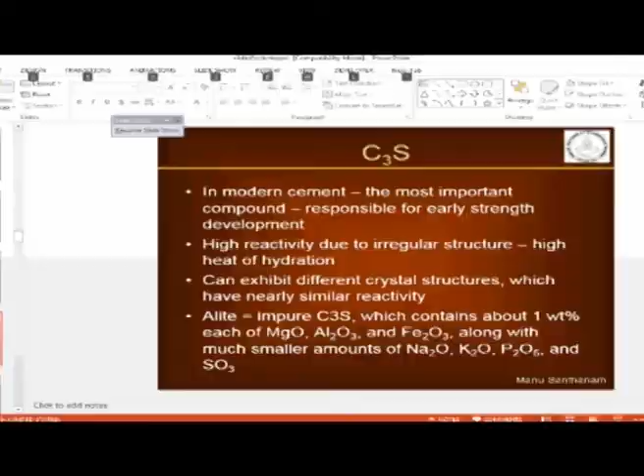Now, how did modern cement get developed? One of the names that comes up in the history of cement development is John Smeaton. Interestingly, John Smeaton was apparently the first civil engineer. Many of you may not be aware that prior to John Smeaton's construction projects, building was essentially taken care of by the army or the military. He was the first person outside the army or military to take up building construction, and that's why he was called the father of civil engineering. He was the first civil engineer, and interestingly, his name also comes up as one of the first sort of cements that was actually used.

While planning the building of a lighthouse tower in the UK in 1756, he found by accident that the best limes used for mortar had a very high degree of clayey matter. That means there were impurities present in the lime that made it very interesting and interactive with water, giving very interesting properties to the lime mortar, improving the binding capacity and so on.

So what he did ultimately was use this kind of impure lime along with pozzolanic material in equal quantities, and this led to the construction of the Eddystone Lighthouse Tower. This was constructed in 1759, but it's no longer in service. It was shifted brick by brick to a different location, but it's still a major national landmark because it was one of the structures first built by a non-military person.

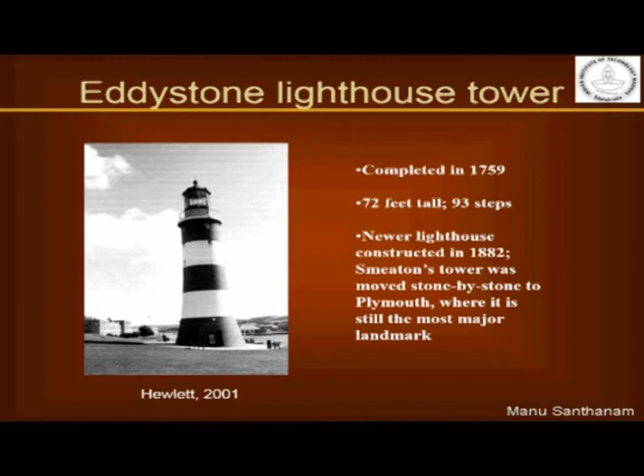One more name you may have heard of is Vicat. Many of you might have tested cement in the lab, and one of the common apparatuses we typically use is the Vicat apparatus. We use it for testing normal consistency and setting time of cement, and we establish how much water is actually required by the cement to get it to a certain workable consistency. So Vicat was one of the principal scientists as far as cement is concerned.

He was the first one to actually prepare an artificial hydraulic lime by calcining or burning an intimate mixture of limestone and clay. That's truly how cement is also manufactured. But until that time, people were simply adding this lime or impure form of lime and expecting it to perform well without really understanding the reactions between the lime and clay. Probably the first person to do this actively was L.J. Vicat, a French scientist.

Now, in the stages of cement development, people have looked at different types of cement over the ages. Today we call it normal Portland cement, but earlier varieties were called proto Portland cement or meso Portland cement, depending on which stage of development we're looking at. One name you might have heard again is Joseph Aspdin.

In 1824, he basically obtained a patent for his cement. Until that time, people were preparing mixtures of lime and clay and burning them together to get cementitious properties, but Aspdin was probably the first one to patent it, and he termed it Portland cement. That's interesting because even today we call our cement Portland cement. This patent was obtained in 1824 and should have run out years ago, but such is the power of the brand name that even today we call it Portland cement.

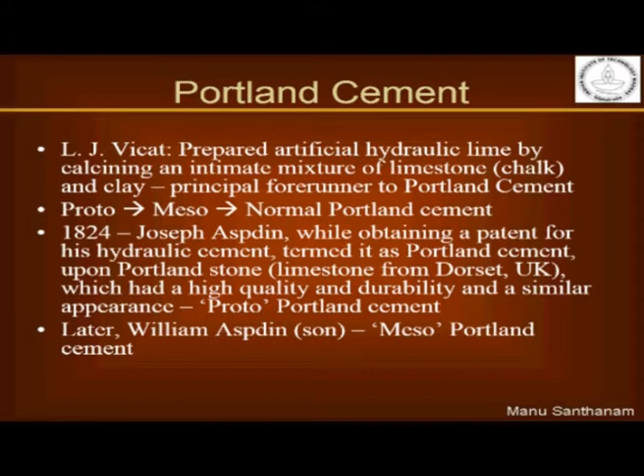Let's take a look at how this was done. This is an example of a kiln that was used for burning by William Aspdin, and on the right side you see an image of the cement actually produced in this kiln, which people removed by scraping off material from the kiln floor. You can see this is a microstructural, microscopic picture with different types of ingredients. The larger grains marked as A are those of alite or C3S, tricalcium silicate, and the smaller grains are those of belite.

This is similar to what you would find in normal Portland cement also, but to some extent the sizes of the crystals forming and their reactivities are quite different. What are the differences principally? Let's take a look at some of these.

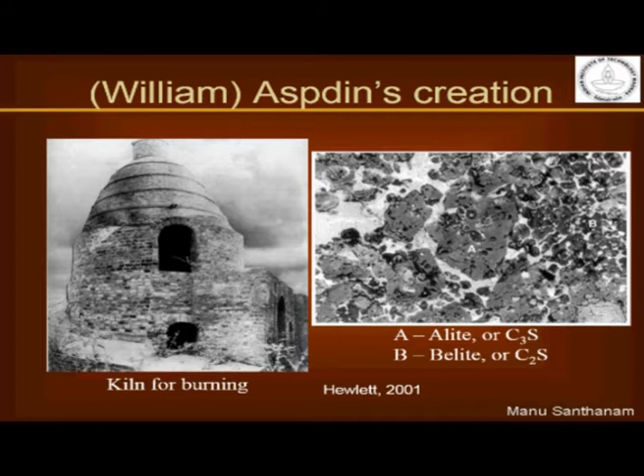If you look at the clinker prepared by Aspdin, the relative burning rate of the clinker would have been quite slow. If you've seen some of the kilns used for brick manufacture in rural areas, you see these are mostly of the vertical type. The material used for construction or preparing the brick is charged into the kiln, then you have the heating source from below, and once burning is completed, you retrieve the material and that's your cement.

In modern kilns, of course, we use a rotary kiln. You feed the material at one end and it simply rotates in the kiln and comes out at the other end, ensuring an almost continuous process of manufacture.

As a result, the modern clinker has a relatively quick burning rate. It spends time in the kiln only for about 30 minutes, whereas in the old times the clinker would have spent as long as it could possibly, based on when they actually removed the material.

As a result of this, the kind of crystals you form of C3S and C2S could be quite different. For example, the alite or C3S size was probably about 60 microns in the old clinker, whereas today most alite crystals are 10 to 15 microns in size, with the overall range varying between 10 to 40 microns. Belite, on the other hand, is a lot bigger today than it was before.

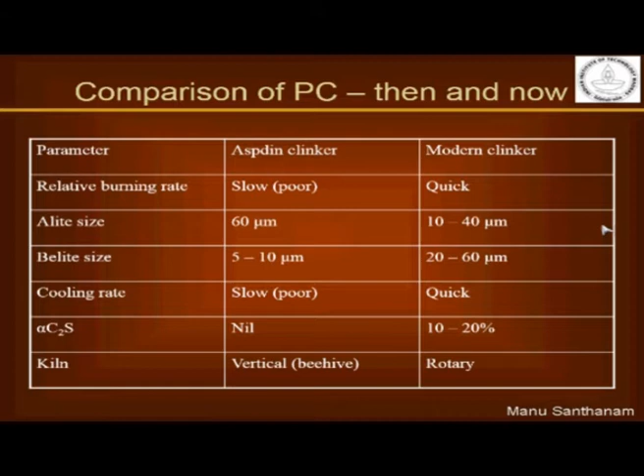Okay, so now let's look at how cement is manufactured in modern plants. You have to keep in mind that cement is a very unusual industrial product. It is produced in very large quantities.

In case you didn't know, in the years 2014 and 2015, the amount of cement produced across the world was 4,000 million tons. So very large quantities of cement, and these are produced in plants that can almost produce nothing else, because cement plants have to be dedicated to producing cement.

The product is produced by a combination of several unusual operations which involve mining, very fine scale mixing or blending of raw materials, very high temperature clinkering reactions, controlled cooling, grinding, blending, and finally shipping in packaged form under very highly controlled conditions. Chemical composition is maintained within narrow limits.

Because ultimately, when the cement goes out to market, when you buy a bag of cement, you have to be sure of its performance. As a result, when they sell the cement, it's sold with a very high degree of control on the chemical composition, otherwise you will not get the right kind of performance.

So again, this is done in spite of very large tonnages. I already told you that 4,000 million tons was actually sold as far as cement was concerned in year 2015.

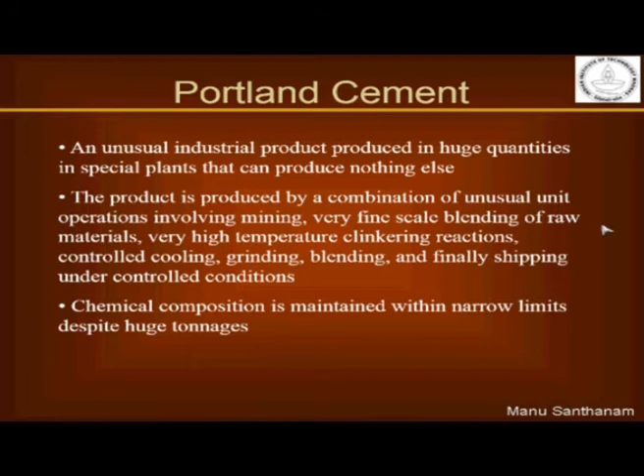Interestingly, India is the second largest producer of cement after China. China was the largest producer and is still the largest producer, but India is expected to overtake China's production by the year 2050, and at that time we'll be the people manufacturing the most amount of cement.

That is only natural because a lot of projects in India are still coming up, and there's a lot of scope for using concrete. And because you're using concrete, you have to use a lot of cement in it.

Now, if you look at the investment required to put up a cement plant, it's upwards of $250 million. It's a very large investment.

And in order to manage this level of investment, you have to produce continuously. The cement has to be produced continuously to pay off the cost spent in installing this capital expenditure, and the plants must also produce continuously over the day to ensure that you maintain the integrity of the kiln.

What am I talking about there? Suppose you are producing cement coming out of the kiln, and you stop the manufacturing of cement for some time. The next batch of material that you put into the kiln will not come out with the same kind of quality, the same kind of consistency, as the previous batch.

Every time you stop the manufacturing, the quality suffers. So to ensure that you have the same integrity of the product as well as the process maintained, you have to make it run continuously. People operate 3 shifts per day, 24 hours a day, 7 days a week. They only shut down probably once a year for maintenance, and without that the cement plant won't work properly.

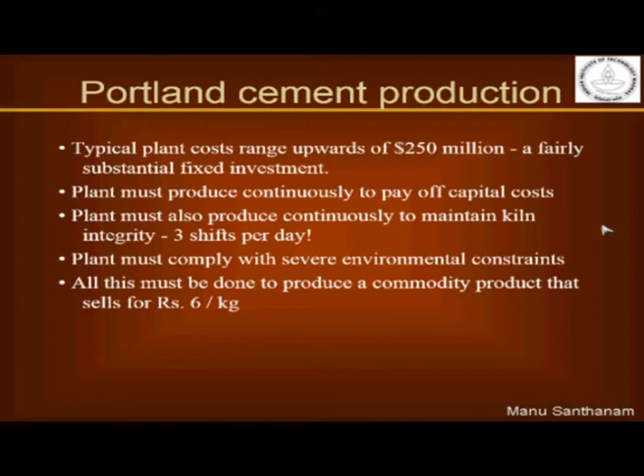As far as raw materials are concerned, the principal raw material for cement manufacture is limestone. We are still clinging to the same technology people used in the past. Lime was the principal binder, then people started using lime with some impurities like clay. Interestingly, cement is basically lime with a lot of clay impurities, and it produces a very interesting combination of products when it comes out of the kiln after reaction.

So the principal source of cement manufacturing is limestone. All cement plants are typically located next to limestone belts or limestone deposits, because that's where you get maximum quantity of limestone, and then you don't have to transport it large distances to make your cement. This limestone gives you calcium carbonate, CaCO3, and it also has some impurities like iron oxide and alumina present within it. The impurities can also include some clay.

Clay is basically aluminosilicate, and in most cases clay is already present as an impurity, but sometimes you may have to extract additional clay to give you the right quantity of silica and alumina, or SiO2 and Al2O3. In the final stages of cement manufacture, we add gypsum, or calcium sulfate dihydrate, as a set regulator, without which the cement reaction would not happen in a normal way. We will talk about that when we get to the chemistry of cement.

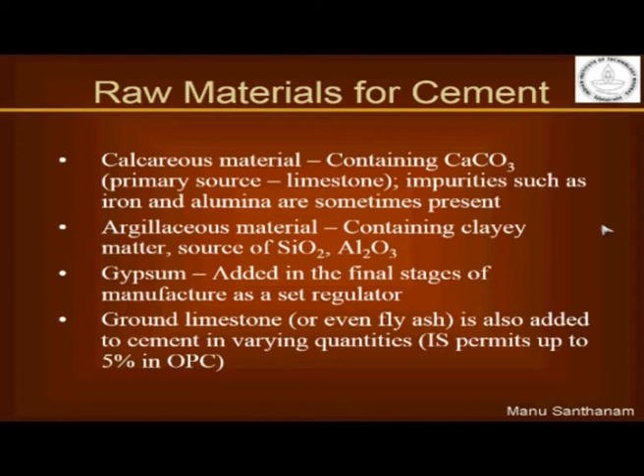Now where do these raw materials come from? There are several sources. Calcium or calcium oxide comes from limestone and from marl. Marl is nothing but limestone with a high fraction of clay minerals, so it's already limestone with clay as an impurity. You also have calcite, naturally occurring calcite or aragonite, which are calcium carbonate forms. You can also get it from shale, seashells, and sometimes even from the dust that comes out from cement kilns, called cement kiln dust. Silicon or silicon dioxide is obtained from clay and from marl.

Sometimes you may have to add sand if you don't have the right quantity of silica. Shale, fly ash, rice hull ash, slag—these are all sources of silica that can be added to the manufacture, supposing you don't have sufficient quantity of it coming from the clay.

Aluminum oxide comes from the clay, shale, fly ash, or sometimes you may have to add aluminum ore like bauxite, not the pure bauxite, but the refuse that comes out of the aluminum ore mining industry. Iron oxide comes from clay, iron ore, mill scale, shale, or blast furnace dust. So all these are components that can be utilized to give the right quantity and blend of oxides needed to manufacture the cement.

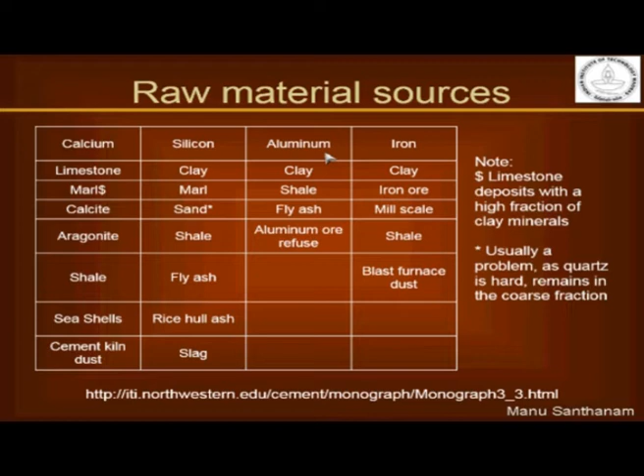So now how is this process going to happen? How is cement production actually done once you have these raw materials in place? Let's look at a simple schematic. This is a fairly easy diagram to understand, but it doesn't really present the entire scale of complexity involved in the process. I'll just walk you through this diagram.

On the top left of this diagram you have the limestone quarry, where the limestone is actually extracted and excavated as large boulders. This has to be ground to a very fine size, so it goes through a crusher and then a secondary crusher to ensure you're getting the right sized material—this is the fine ground limestone that you get.

Then it goes into a storage silo, where there are other storage silos for clay and sand if you need them—for example, if the quantity of materials required is not sufficient, you need separate silos for the clay also. Then you do a proportioning, mixing it in the required quantities, and send it to the grinding mill to ensure these are blended or mixed properly.

Once it goes through the grinding mill, it goes through a set of towers called the preheater towers—the preheater, meaning before it goes into burning in the kiln, it gets heated. I'll come to why this is done a little later.

The material from the preheater tower comes into the cement kiln or rotary kiln, where it moves by gravity from one end to the other, where the fuel source is located. So you can imagine that where the fuel source is located, the temperature of the kiln will be the maximum, and at the other end where the material actually enters the kiln, the temperature will be the lowest.

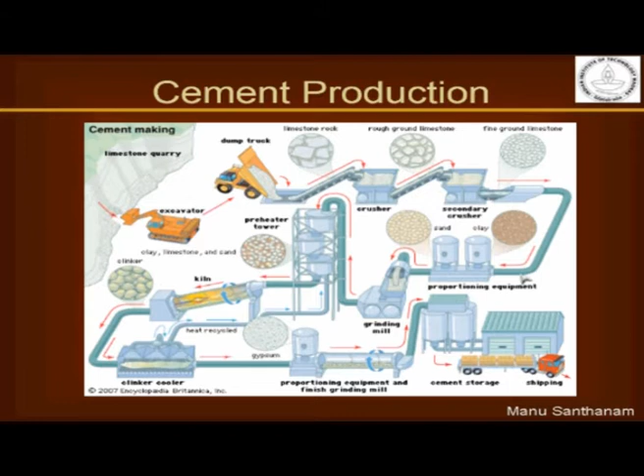We'll talk about different steps involved in this process shortly. This schematic diagram again depicts the same process in a much easier to understand manner: limestone quarrying followed by crushing and grinding to get the right size material, then two ways of mixing the materials together—one called the dry process, one called the wet process. We'll talk about these in more detail shortly. With the dry process, you typically also have preheating, and then the material is sent to the rotary kiln.

From the rotary kiln, the material comes out, gets cooled in a clinker cooler, and then the clinker is stored and finally proportioned with other additives like gypsum, fly ash, or limestone, as the case may be. Then the cement is produced to the required degree of fineness and physical and chemical properties, and it is sent for dispatching. Okay, so I'll just walk you through a typical cement plant that you'll see.

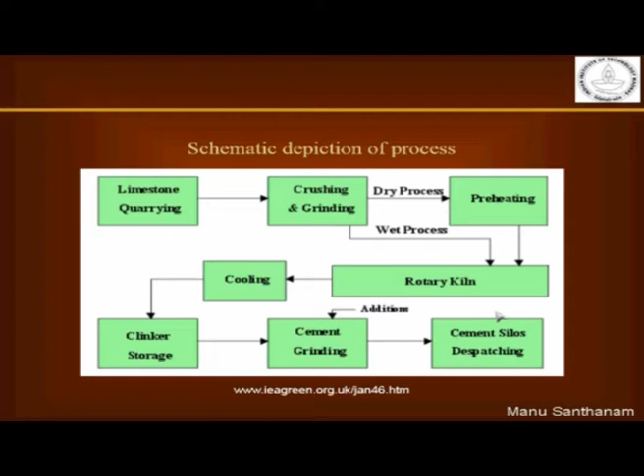Some of you may have visited cement plants, so this may not be new information for you, but I'll just walk you through a cement plant to show you the kind of processes taking place. This is an example of a plant I had visited in Chhattisgarh - a Lafarge cement plant.

You can see here, this is the yard where they stored the limestone. On the right side of this image, you see a heap of limestone that has been stored, and you can also see a large set of conveyor belts all over the place. These conveyor belts are going to take this limestone towards the grinding operation.

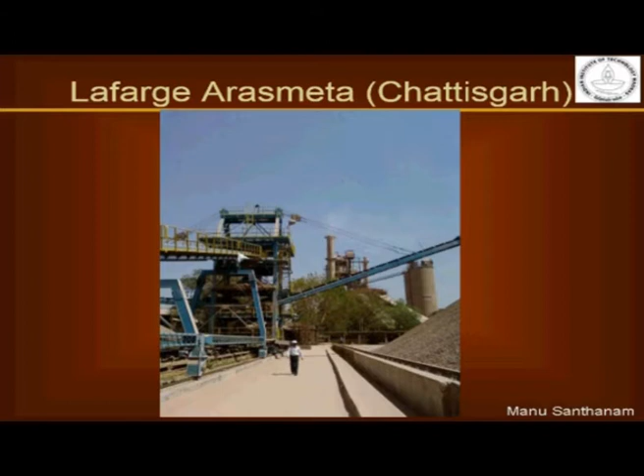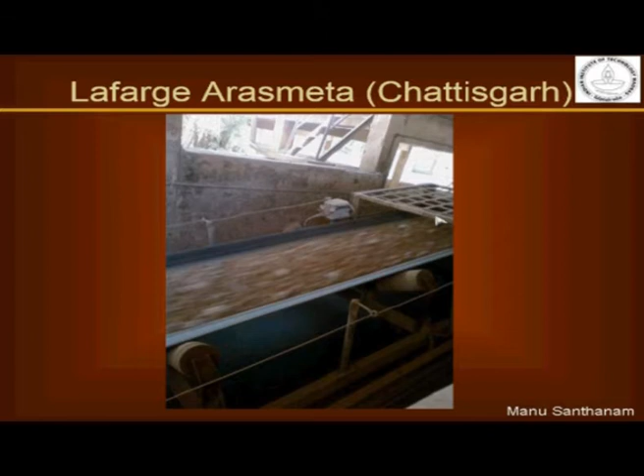So you see the conveyor belt now carrying the limestone towards the grinding operation, and this will go into a grinding unit or a pulverizer where the limestone will be ground to a size small enough to mix well with the clay. So now this is the grinder - the unit which is grinding your limestone and converting it to a very small size.

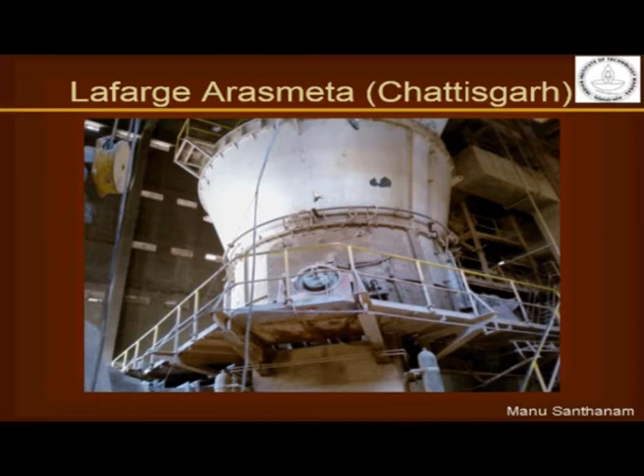Another picture of a different grinder, because the crushing equipment is typically separated into different parts. You have a coarse crushing and then a fine crushing, to ensure that you finally get a very good mix or blend with the raw materials.

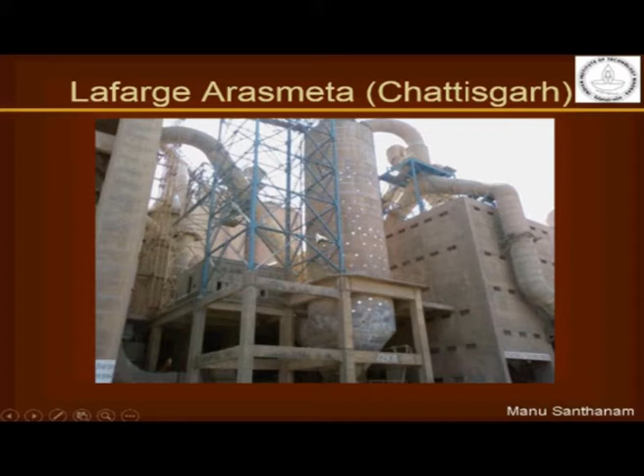After crushing, it goes into this storage silo, and from this silo it will be proportioned in the right quantities and the material will be sent to the preheater tower.

So this is your preheater tower, where the material that is mixed up together - the limestone and clay - is sent. We will talk about the significance of preheating in just a little bit.

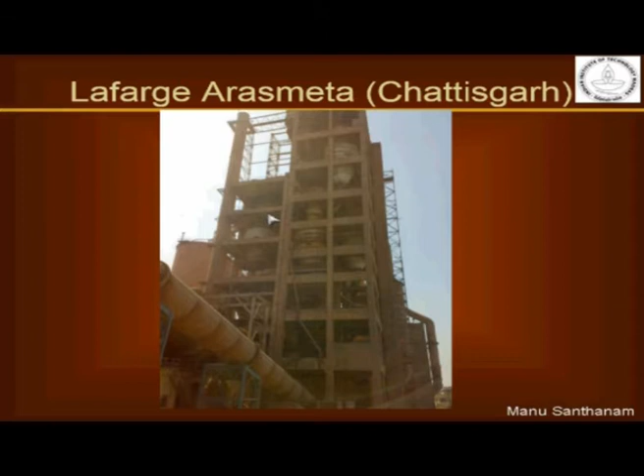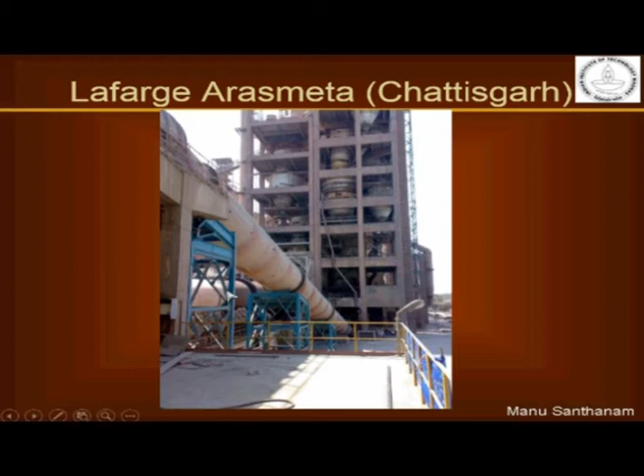Once the material comes into the preheater tower, it goes through different stacks and finally ends up in this rotary kiln. Now, of course, the rotary kiln is not at your front, it's at the back - you can see it here. I'll show you another picture of this. This is your rotary kiln, which does not have a very large slope.

It has a very gentle slope, so that the material that comes in at one end gently goes with its own weight, basically without any added pressure. It just goes by its own weight from one end of the kiln to the other end. Okay, that's your rotary kiln.

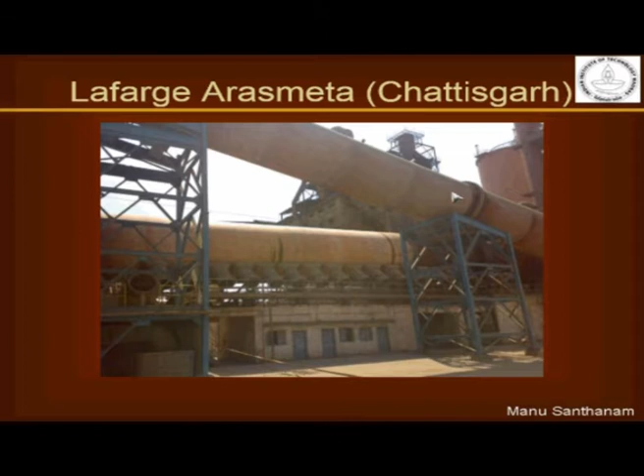This pipe here that you see, of a large size in front of the rotary kiln, is actually used to carry the heat back into the system. So the heat that is released or wasted in the process of clinkering is retaken and sent back into the preheating process, so that you can improve the efficiency of the process.

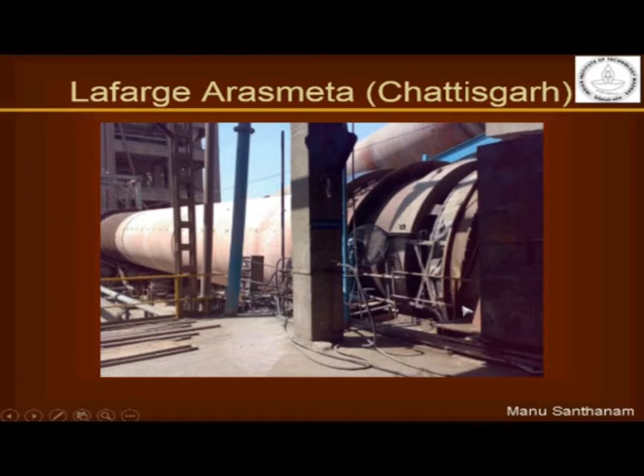Now this is the rotary kiln again from the other end. The material comes in at this end and comes out at this end. So you can imagine that the fuel source is located at this end of the rotary kiln, where the maximum temperature will also be felt.

This is the end of the rotary kiln. So what I am showing here is actually the fuel source. This end is the fuel source where the maximum temperature is, and the material is actually coming out at this end.

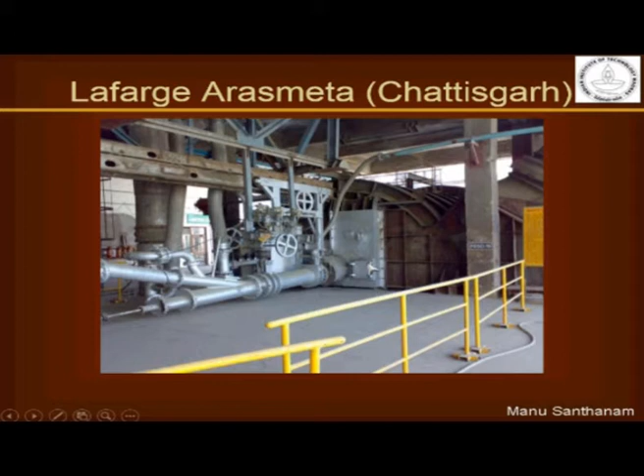And this is the control operation of the cement plant or rotary kiln. In cement plants, everything is highly mechanized and computer controlled. You don't really have any human intervention unless something goes wrong, of course. Most of the processes are well controlled by an interface which is very easy to operate, and quality control also forms a large part of this entire scheme of things. I'll come to that towards the end of this lecture.

And so this is the clinker that is actually coming out of the cooling process. You can see here the clinker coming out. This clinker is almost looking like nodules, so it doesn't look like a powder. This is because of all the fusion that has taken place inside the rotary kiln and after the cooling process. So you can actually see the clinkers in the form of nodules. You can imagine that this has to be broken down into a very fine powder to get the typical cement that we are all understanding, or what we typically get in the market.

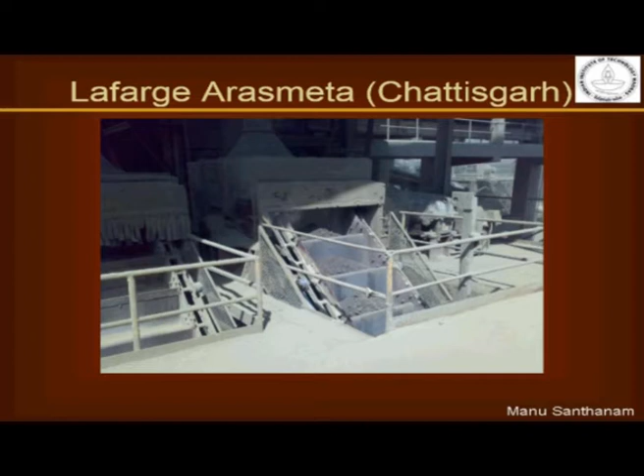Alright, this is again a picture of the final process of cement manufacture. You can see the storage silos for the cement from which it goes to the packaging, and the packaging is either done in bags or the cement is actually shipped in bulkers.

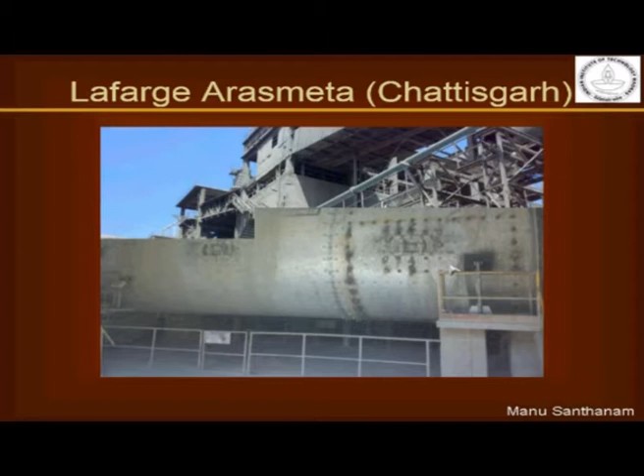Oh sorry, I missed one step in the process. That was not the packaging silo, that was actually the silo for the clinker, because one more step is there in the cement manufacturing process. The clinker is interground with the gypsum and other additions in this large cylindrical drum, which is basically the ball mill. So all that is done here is that you put your clinker and all the additives into the ball mill, then you add these large steel balls and this drum rotates. So the steel balls simply crush the clinker and the other additives together. So by impact you are crushing and blending at the same time. You're not only crushing the material to the right size, you're also ensuring that there's a very uniform blend between the cement, clinker, the gypsum and any other additives that you may put in the process.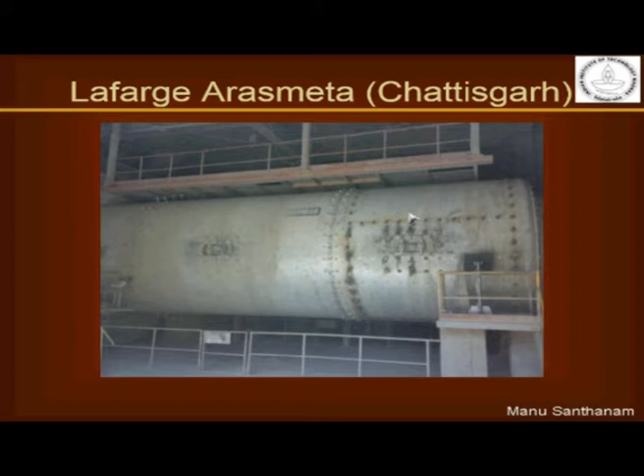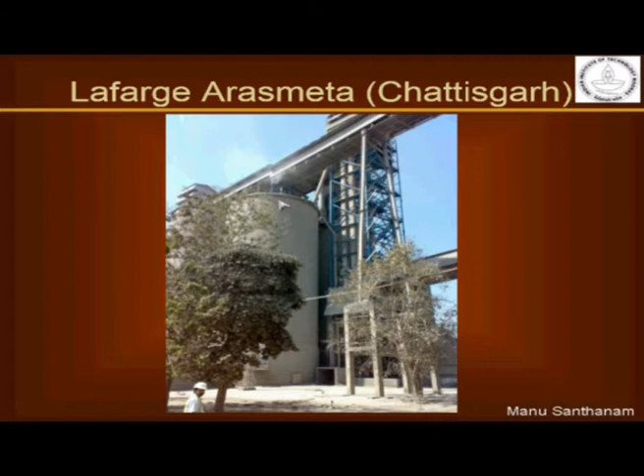Okay, so these are the processes that are involved in the cement manufacturing. After you get the material out of the grinding mill, it goes to storage and finally packaging and shipping. So those are the processes that are involved in cement production.

Now before I get to the individual steps in the manufacture and try to give you an understanding of why these processes are important, I'll open the floor for any questions you might have, because at this stage we are moving into a slightly different scheme of things. We'll get into the specifics of cement production. So before we get into that, please do let me know if you have any questions.

Okay, there's a question by one of the people in the audience on when to adopt dry process and wet process. There's another question on what is green concrete. Now of course this is not really part of the lecture that I've given, but I'll answer that anyway.

So very many people have different ways of saying what is green concrete. One way to look at green concrete is what is environmentally sustainable. That means concrete that uses materials that really don't put a large burden on the environment. For example, if I replace a large part of my cement with something like fly ash, let's say I use a high volume fly ash concrete, I can call it a green concrete. It's green from the environmentally sustainable point of view.

But in different parts of the world, green may have a very different meaning. For example, if you go to the US, green concrete is something that is not set. So that's very interesting. In India, we call green concrete as something that is environmentally sustainable, but in the US, they say green concrete is something that is not set. So again, it depends on what you are meaning by the word and where you are in the world. That really helps you understand what this term is all about.

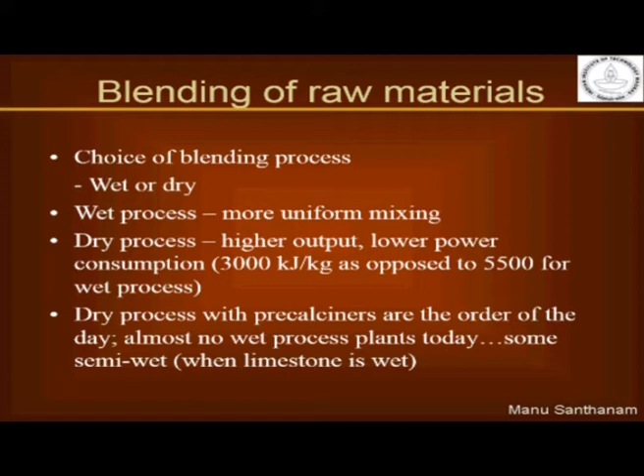So just to look at some guidelines adopted by companies for wet or dry manufacturing: when the raw materials have a moisture content greater than 15 to 20%, already coming very wet when extracted, it may be advantageous to simply grind and blend it in wet form, because there's already a lot of water present. But in most cases, when moisture content is low in the raw material deposit, like less than 8%, you do a dry blending. In that case, all the water present will be naturally removed during the blending and early clinkering process.

When your water content is somewhere between 8 to 15%, you prepare what is known as a raw meal slurry, similar to wet process, and then send it to a very small kiln to drive off that water before the material goes into the rotary kiln. The idea is that the rotary kiln length should not increase and the power consumption should not increase because of this water present in the raw material. So you adopt a process where you send it through a very short kiln with a cyclonic preheater.

Nevertheless, wet process does give you a better blend, but today it's not really useful to talk about it because most plants are dry process plants. One example of a semi-wet process plant is the Associated Cement Company's plant in Madukkarai near Coimbatore, where we still have the semi-wet process adopted because of the kind of limestone found there. But most plants located in the Ariyalur belt of Tamil Nadu, and in the Kadapa belt in Andhra Pradesh, are actually dry process plants.

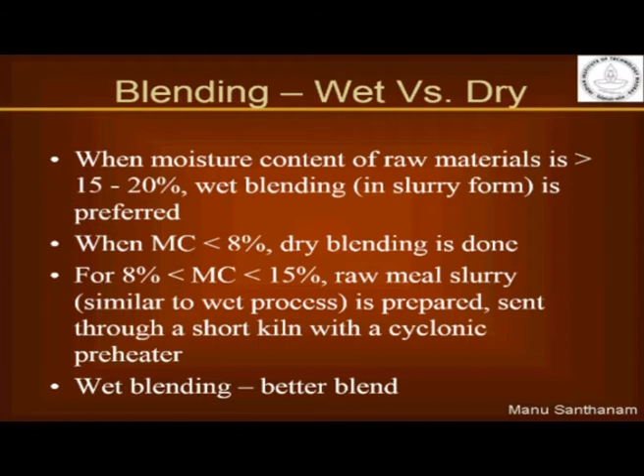The same principle is adopted in a preheater tower cyclonic separator, where you put in the feed. It has a cyclonic motion with which the mixed powder goes into this preheater, and the heat generated there gets rid of all the moisture present in the raw material.

In this cyclonic process, when the mixture is inside the cyclonic preheater, there is also much better mixing taking place, and ultimately all the material comes out and goes into the rotary kiln, which is at the end of this preheater tower.

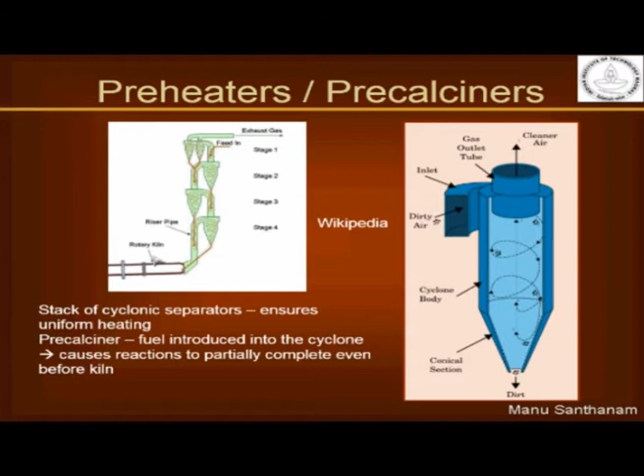Now, the most important part in cement manufacture is the burning of the raw materials together in the kiln. In the past, people used the vertical or beehive type kilns, but today only rotary type kilns are actually used.

Typical kilns are really long, 30 to 70 meters in size, and some of these are 5 to 6 meters in diameter. So you can imagine these are substantially large pieces of equipment.

Of course, the length of the kiln depends on the process. If you have a dry process, your kilns are shorter. If you have a wet process, in order to drive off the excess water present in the slurry, you need much longer kilns. So the dry process involves smaller kilns, and the wet process involves longer kilns.

Obviously the dry process is much less costly compared to the wet process. Inside the kiln, at the fuel source end, the temperature is close to about 1450 degrees Celsius.

At the inlet point, where the material comes from the preheater, the temperature can be up to 800 to 850 degrees Celsius. So what you need to understand is that the cement reactions forming the cementitious compounds do not get completed inside the kiln itself.

The process actually completes only when the material comes out of the kiln and goes through the cooling process.

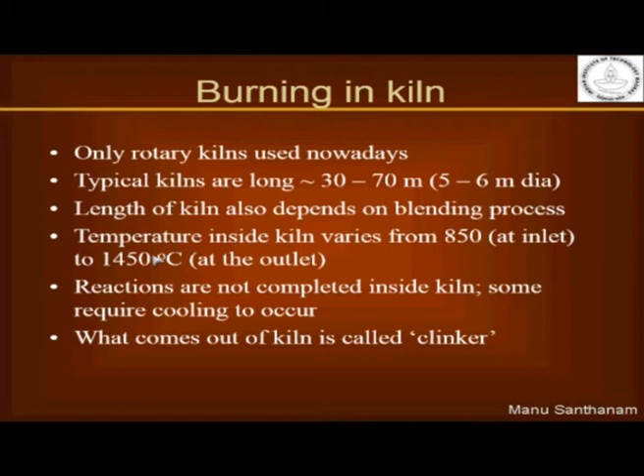What comes out of the kiln after cooling is called the clinker, cement clinker, and that's what goes into the final stages of cement manufacture, where it gets ground with gypsum and other additives to make Portland cement.

There is a lot of chemistry and geology required to really understand the reactions that take place inside the kiln, but I will run you through some of the important reactions so you can understand how these compounds actually get formed.

The clinkering reactions primarily involve the conversion of calcium carbonate, silica, and the alumina bearing components into a special mixture of different types of compounds which have the possibility to react with water and set and harden in a reasonably good amount of time.

The majority of the reaction ends up producing impure but well crystallized fine crystals of tricalcium silicate, that is C3S, and dicalcium silicate, that is C2S, as we talked about previously.

So you are still producing crystalline components, but these are fine crystals of size less than 50 micrometers.

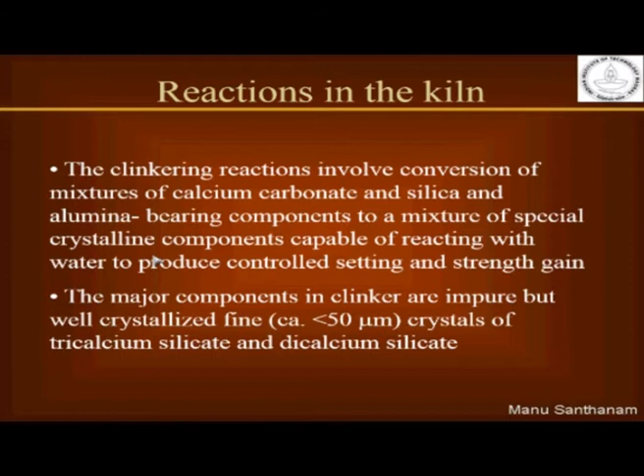But there are also other reactions that take place which lead to very interesting properties of the cement. You form the aluminate compounds C3A, that is tricalcium aluminate, and C4AF, that is calcium aluminate ferrite solid solution. These are minor compounds that are also formed, but they also have a very large influence on the cement behavior when cement actually reacts with water.

Now, apart from these major compounds, there are also some minor amounts of components that are present, soluble crystalline components, primarily alkali sulfates and calcium alkali sulfates. These are present usually on the surface of the grains of the clinker particles like C3S and C2S.

These impurities, which are alkali sulfates, interestingly give very useful properties to the behavior of your tricalcium silicate and dicalcium silicate. That is why earlier I had said that C3S is a pure form, whereas alite is an impure form of C3S. So when the alkalis and sulfates are present on the surface of these clinker particles, then they are called alite particles and not C3S particles.

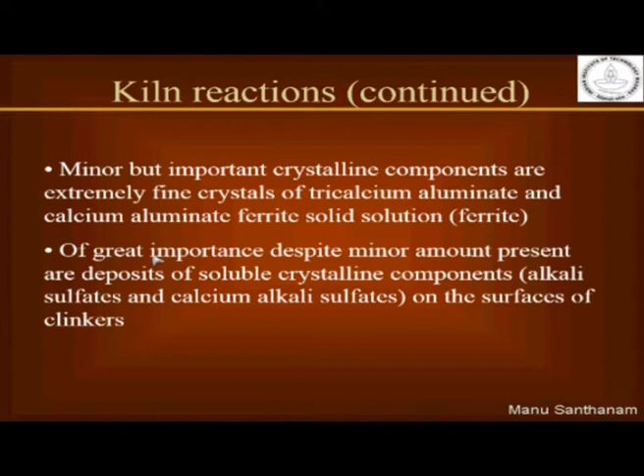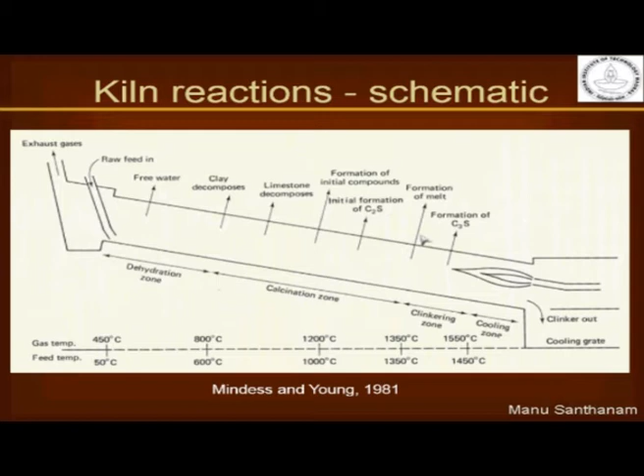So cooling has to be done in two stages. Typically, up to 1200 degrees Celsius, the clinker is cooled suddenly, and after 1200 degrees Celsius, because at 1200 you are now back to this temperature, there is no danger of conversion of C3S back to C2S, and the molten phase also would have become solid at that temperature. After 1200 degrees Celsius, the clinker is cooled at a slow rate down to normal ambient atmospheric temperature.

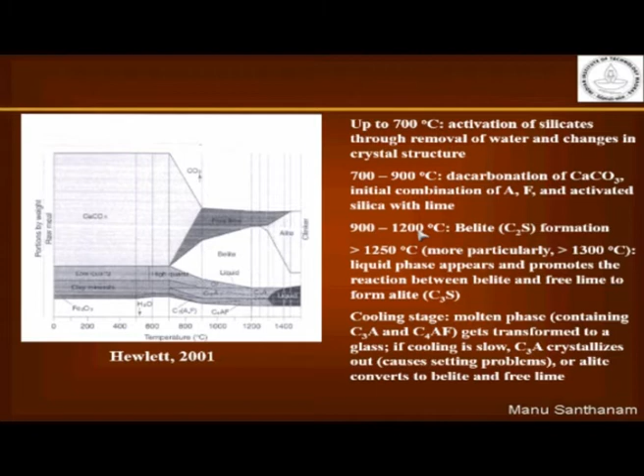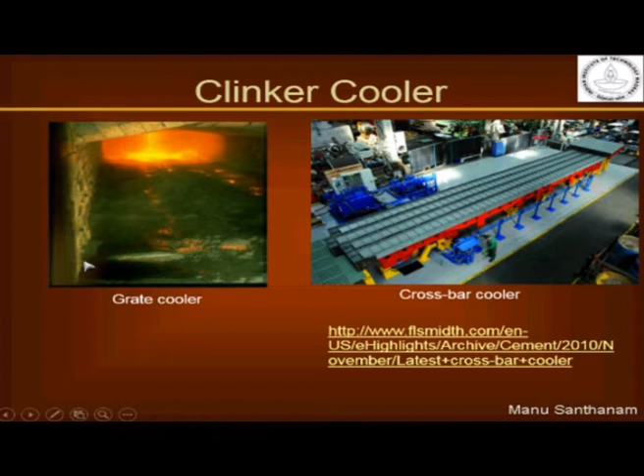Okay, so clinker has now come out. The clinker I showed you earlier in the cement plant pictures has come out in the form of nodules, and now this has to be ground to the right size to make cement.

At the time of grinding, as I told you earlier, we add the other additives in the process. So you have your gypsum, which is added as a set regulator. In the absence of gypsum, we have a condition called flash setting. If you do not add gypsum to your cement, it reacts very fast with water, liberates a lot of heat, and sets immediately, and you can't use that cement or concrete anymore. That's called flash setting. Now you don't want that. To ensure that you don't get flash setting, you need to add gypsum in the process.

So in this final stage of cement manufacture, you add gypsum to the clinker and then grind it together in a ball mill. As I told you earlier, the ball mill is a rotating drum where you put steel balls which collide with each other and grind the clinker and gypsum together on impact. Other additives that you may have in the system, like fly ash or limestone, may also be added during this stage. This is the final stage where you can add any sort of additives. You might have heard of blended cements like Portland pozzolana cement or Portland slag cement.

The fly ash or slag used to make blended cements are added during this process of final grinding. Ball mills are today being replaced by more efficient roller presses, where two rollers press the raw material together. This is a much more energy efficient grinding process that leads to formation of very good fine sized cement particles without too much energy being spent. There have been several changes to manufacturing technology, but ultimately this produces cement of the required fineness. That's the importance of the intergrinding process with gypsum.

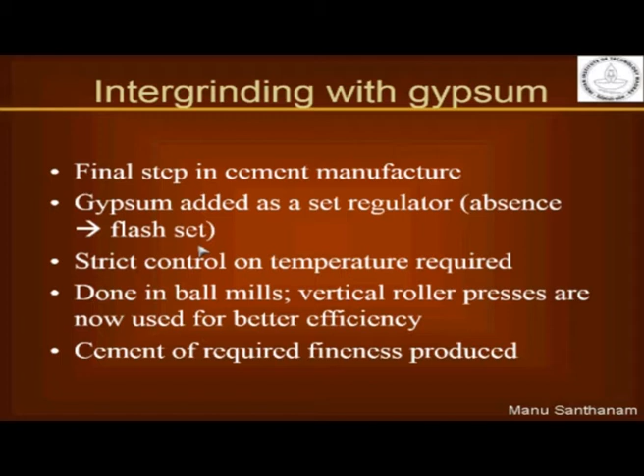Now, something important for when we talk about cement chemistry later: while intergrinding the gypsum with the cement, you need strict control on the temperature. Why is this done? Because gypsum is calcium sulfate with two molecules of water. Let me explain this on the board for clarity. Gypsum is calcium sulfate.

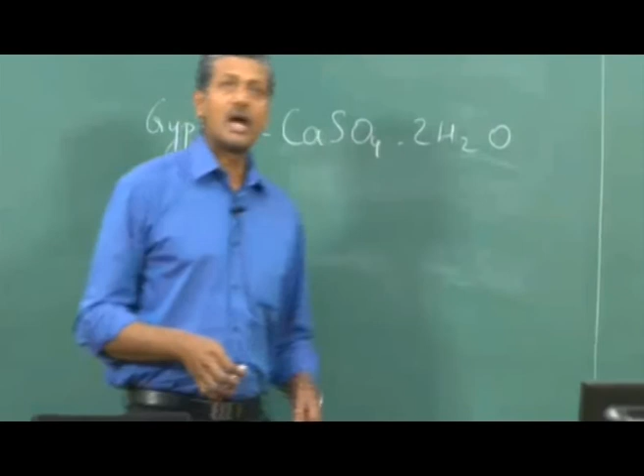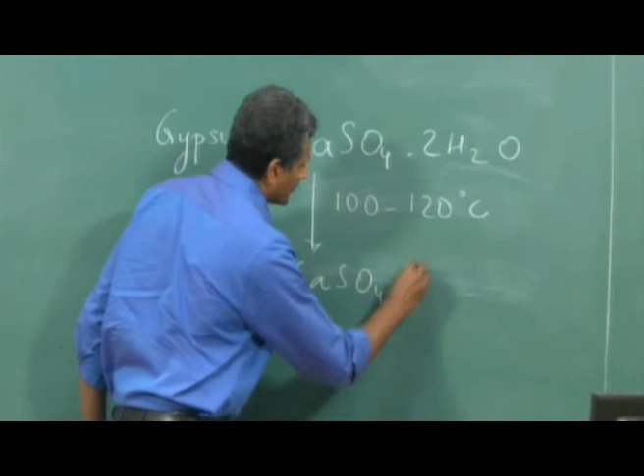When you add gypsum to the clinker and grind it in the ball mill, if your temperature goes between 100 to 120 Celsius, you may have seen this before if you've worked with plaster of Paris. When you heat gypsum to 100-120 degrees Celsius, it converts to plaster of Paris, that is CaSO4 half H2O, the hemihydrate. If heated further to around 130-140 degrees Celsius, this may convert again to calcium sulfate without any water, called anhydrite.

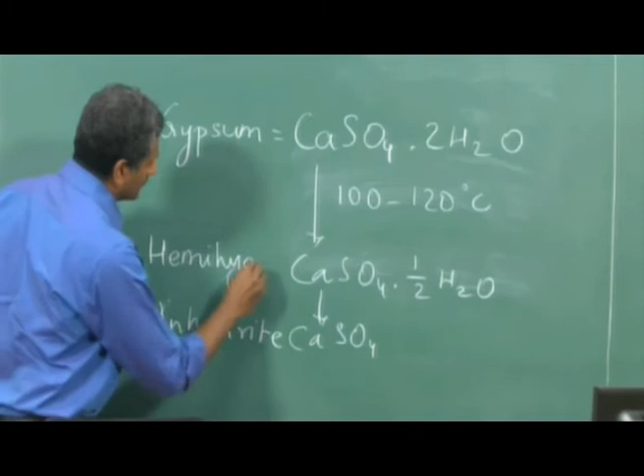Now why is this important? What is the problem with this? The sulfate has to be available in the cement to react, and sulfate comes from the solubility of the gypsum. Gypsum has to dissolve and release the sulfate. The sulfate reacts with the aluminates to form different compounds, which we'll discuss in cement chemistry, but the rate of solubility of these compounds could be quite different.

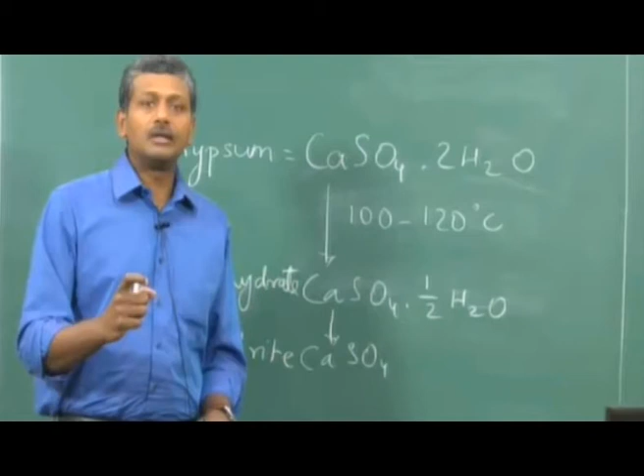For example, if you take gypsum and heat it to hemihydrate, its solubility actually increases, meaning you get more sulfate quickly into solution. If you heat hemihydrate to anhydrite, solubility increases still further. So from natural gypsum to hemihydrate to anhydrite, the solubility is quite different. As a result, if you don't know what blend you have in terms of sulfate type, you can't predict the initial setting and hardening behavior. So it's very important to have clear temperature control in the process, so we have a right idea about what type of sulfate ends up in the cement.

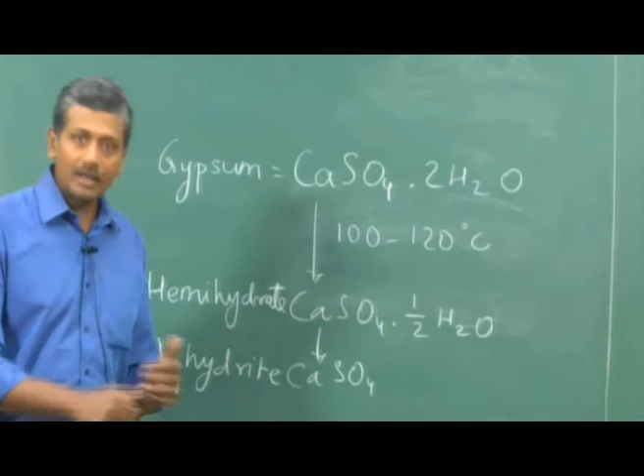I'll come back to this when we discuss cement chemistry in the last part of this module, but for now we'll return to the cement grinding and manufacturing process.

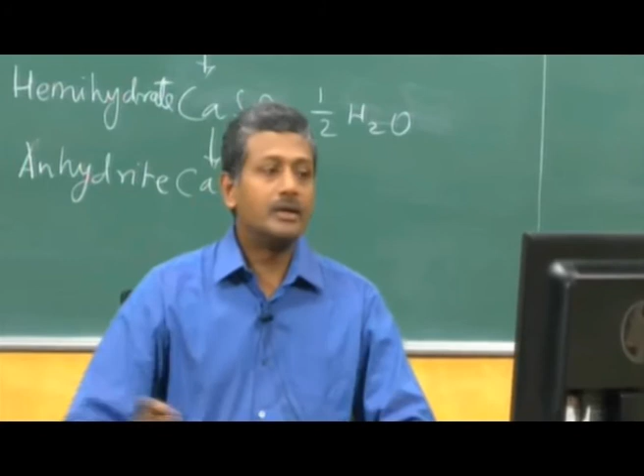Earlier I mentioned that one common form of gypsum used nowadays is phosphogypsum, a waste or byproduct from the fertilizer industry. Cement companies want to cut production costs, and one way is to find substitutes for naturally occurring materials which are not always abundant. I've seen cement plants import gypsum from Middle East countries to ensure the right quality material for their production process. Phosphogypsum from the fertilizer industry presents a viable alternative to natural gypsum in cement manufacture. However, it may not behave exactly the same as regular gypsum.

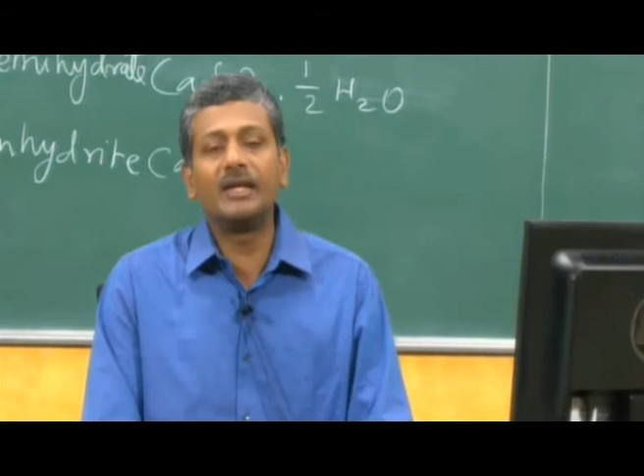This is an important stage in cement manufacturing because you're producing cement of the right fineness, while also having different blends or types of gypsum—anhydrite, hemihydrate, or dihydrate (regular gypsum)—which may affect the reaction when cement reacts with water. We'll come back to that with more clarity in cement chemistry. Let's continue, just a couple more slides to go, and then we'll be done with the production section in this module and I'll open the floor for questions.

Now, because of the issues involved in this cement manufacturing process, you can imagine that you are extracting naturally occurring material, subjecting it to a very large set of processes, and ultimately you want to end up with a material that is highly well controlled in terms of physical properties and chemical composition.

So to do this, there has got to be a very high degree of quality control adopted in this process. You might have seen that when you buy different brands of cement from the market, although all of them claim to be 53 grade cement, the kind of concrete you end up producing with these cements is quite different. Sometimes you don't get the right strengths with the 53 grade cement or a 43 grade cement. You might have seen in your research projects that when you change the brand of cement, suddenly your overall system changes, and you're not able to get the same results you got with the older cement.

In production, in the concrete construction process, this is all the more important because the construction process takes place over a period of several months or probably several years. During this time they'll have to go through several different batches of cement, several types, several brands, and several batches of the same brand of cement. So if there is variability, there's got to be a major issue with the quality control in the system.

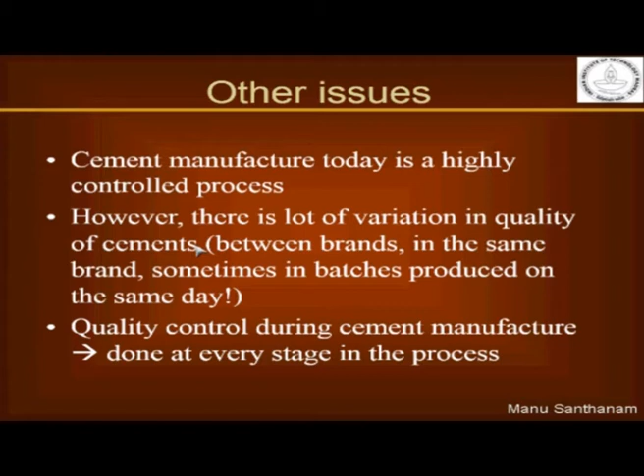So to avoid variability in the kind of cement being produced, cement companies spend a lot of time doing quality control, and this quality control during cement manufacture is done at every stage in the process. I literally mean every stage, because sampling and evaluation of the material is done at several stages.

One, after excavation from the quarry, because you want to know if you have the right kind of material that has been removed; before and after blending the raw materials together, because the right composition has to end up in the final blend you select; after formation of the clinker, because that is what is coming out of the kiln and you need to evaluate it with respect to its oxide and compound constituents; and after intergrinding the clinker with the gypsum, and finally before packaging in bags and drums.

Because ultimately you don't want, at any stage, the composition to go out of a given strict range, since you want the cement to have a very clear cut predictable performance in the concrete. This has to hold between several batches that you produce in the same day, and across a given month.

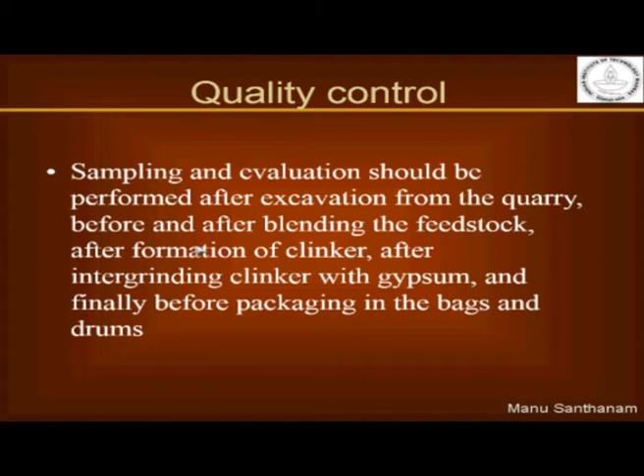This is why it's very important to use cement in as fresh a state as possible, because oftentimes the variability between batches produced in different months may be quite different. So once you have a stock of cement, you have to use it up as early as possible.

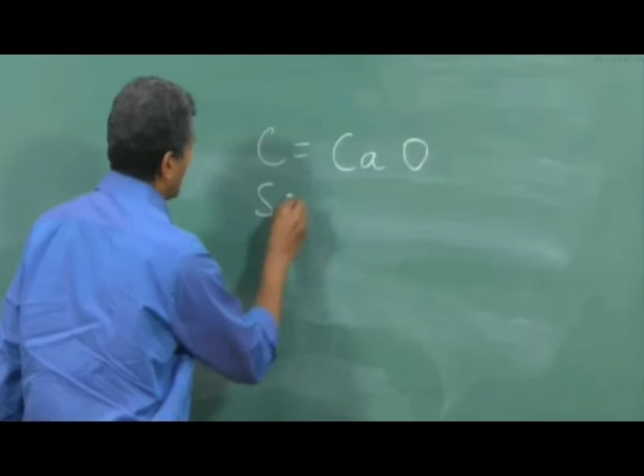As a percentage, it's the amount of calcium oxide. Please remember, C is calcium oxide, S is silicon dioxide (SiO2), A is aluminum oxide, and F is iron oxide. Let me write this again on the board for clarity: C is calcium oxide, S is silicon dioxide, A is aluminum oxide, and F is iron oxide.

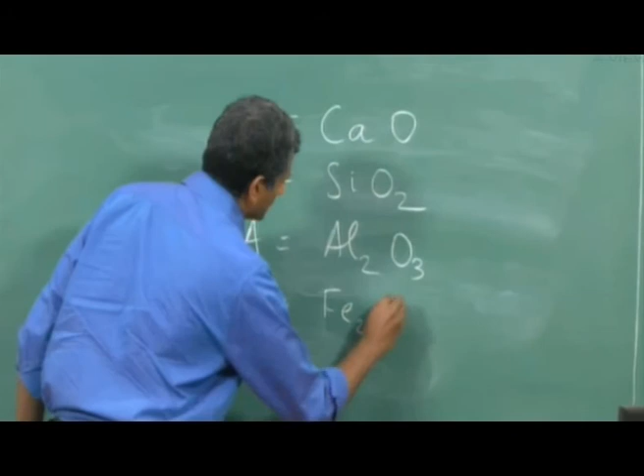So here the lime saturation factor is basically giving an equation relating the amount of calcium oxide to some weighted fraction of the amounts of alumina, iron, and silica: C divided by (2.8 S plus 1.2 A plus 0.65 F). Now you may be wondering why this complicated equation - it's a way to adjust the quantities so that you get the right blend of your C3S, C2S, C3A, and C4AF.

In other words, this lime saturation factor tells you how well combined your calcium is with the silica, alumina and iron oxide, because we want a mixture of C3S (tricalcium silicate), C2S (dicalcium silicate), C3A (tricalcium aluminate), and C4AF (calcium aluminate ferrite). So this equation basically tells you how well the calcium is actually combined.

As I told you earlier, if you have free lime in the system, that is free calcium oxide, it leads to unsoundness. So you need to ensure that the lime saturation factor is kept generally between 92 and 98%. This ratio of C divided by 2.8S plus 1.2A plus 0.65F should be kept between 92 to 98% to get the best results for cement. If you have more than 100%, this indicates the presence of free lime in the system, which is a disadvantage and causes unsoundness.

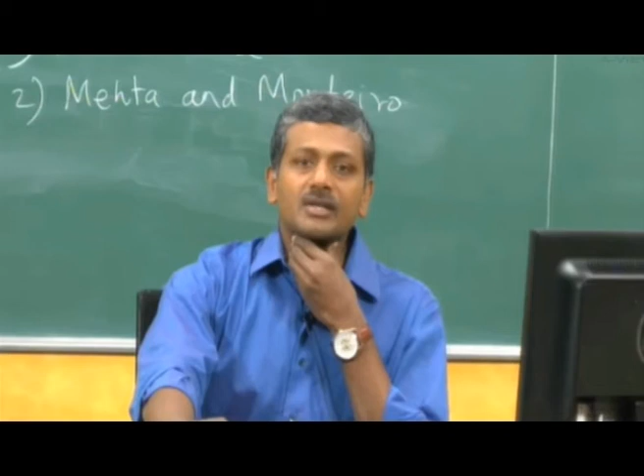What is the effect of atmospheric conditions on the cement manufacturing process, and at what rate should temperature rise? Atmospheric conditions outside are not all that important to us. It's the conditions generated inside the kiln that matter, and those can be controlled to a large extent by using the right kind of fuel and the right burning temperature.

If the proportion of alumina oxide is different, what changes? Remember, the cement manufacturing process does quality control at several stages. When you extract raw material from the quarry and decide the blend between limestone and clay, you're already ensuring you get aluminum oxide in the right quantity. If you don't have enough, you use aluminum oxide ore or bauxite as an impurity to contribute aluminum oxide content. So during proportioning itself, you ensure the right quantities of all the oxides, meaning you never produce cement with an unknown quantity of this material.

Another question is about the size of the aggregate, though this is really about concrete rather than cement itself. The aggregate size depends on what concrete you're using and the spacing available between reinforcement. For example, if the spacing between reinforcement is 40 millimeters, there's no point restricting aggregate size to 12 millimeters; you could use something greater than 20. It also depends on the cover to the concrete—if the cover is only 15, you can't use aggregate of 20-25 millimeters. This is mostly determined by the engineering construction process and reinforcement spacing, not by the cement type. It's entirely based on the project at hand.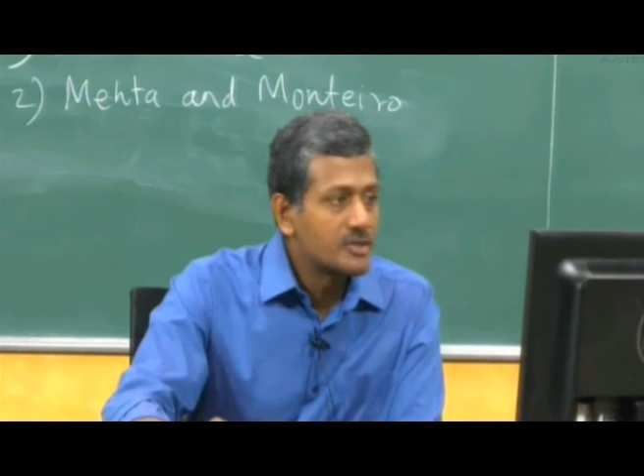What is the benefit of finding the silica ratio and alumina ratio? Again, it's not for the benefit that the cement is getting, you only have to ensure that your manufacturing is being done with the right proportion of the ingredients. So the idea of finding silica ratio and alumina ratio is to ensure that you are always keeping your cement proportion in the right range that you want. Only by doing that will you get the correct mixture of compounds like C3S, C2S, C3A and C4AF.

Three grades of PPC - again, please remember, PPC or Portland Pozzolana cement does not have any grade. It's only OPC, or ordinary Portland cement, that has three grades: 33, 43 and 53. We'll talk about these grades of cement in the next chapter on cement composition.

Dry or wet process, I believe I've answered that question. Ultimately, the process depends only on the state in which the raw materials are found. If you have very wet raw materials, then you might as well go for a wet process. But generally nowadays only dry process plants are preferred because they are much more energy effective and produce a larger output for a given quantity of material that goes into the cement kiln.

How does physical properties, setting time and strength change by adding fly ash and silica fume? Again, we will talk about this later when we discuss blended cements in the cement composition section. It's not truly related to what we are talking about here.

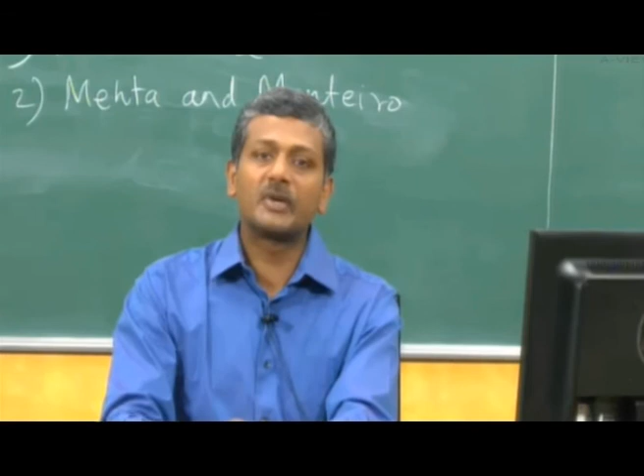Is there any in situ test to determine the strength of cement for different brands? No, there is no in situ test. You have to do the test as per Indian standard prescription, where cement is mixed with sand and water determined by the normal consistency of the cement, then cubes are prepared and tested. That is the only way to actually test the cement.

Classifiers are systems typically used to clean the air, removing dust and leaving clean air. They have a cyclonic action similar to what's used in a preheater tower. Classifiers are also used in cement manufacturing to ensure the right size of raw material after it has been pulverized. You need the finer size particles, and the coarser particles are fed back into the grinding process. So classifiers help separate the finer size from the coarser size.

I think there are some interactions that people want, so we will go to those, and I hope I have answered most of your questions. We will also start the next session next week with a question and answer session, so if you have more questions about this production process, you can ask then. There are some interactions we will go to now.

I'll round up today's discussion by answering a few remaining questions. One question is about the final setting time of cement, after which concrete supposedly becomes useless. I'm not sure what you mean here—truly speaking, after the final setting time the concrete has attained a given form and you can't change that form after that. So I don't think it's right to say concrete becomes useless after that point. Really, the concrete is becoming useful only after that point, because it hardens and gains strength, providing strength to your structure only after the final set.

Main benefits of using dry process over wet process: first, you consume lesser energy for manufacture of cement. Second, for every ton of raw material fed in, you get a larger output of cement clinker compared to the wet process, because in the wet process the raw material has a lot of water which gets driven out. So for every ton of raw material in the wet process, you get only half a ton of clinker, whereas in the dry process you get a substantially larger amount.

Heat of hydration is again a question we'll attempt to understand in cement chemistry, but it essentially means the amount of heat liberated when cement reacts with water. There are various factors that control this, which we'll discuss in cement chemistry. Okay, what are the solid solution constituents?

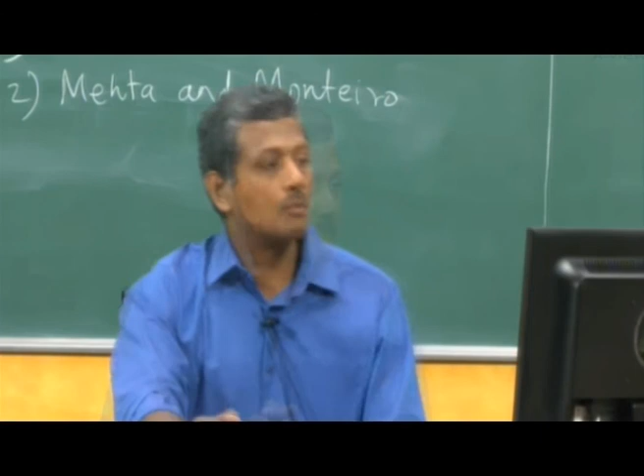Solid solution is something we'll talk about when we discuss the composition of cement. This relates to the calcium aluminate ferrites present in the system. They are not present as a single compound, but a mixture of several different compounds, that's why it's called a solid solution. It's not of major interest to a civil engineer to understand the different constituents present in the solid solution, but the average formula for the solid solution is C4AF.

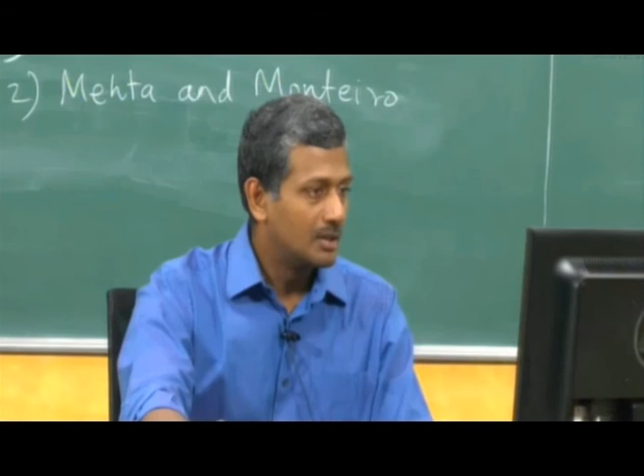Which ingredient in cement is responsible for efflorescence in concrete and how to control it? Please remember cement as such reacts with water to produce hydrated cement paste, and one of the ingredients inside hydrated cement after it reacts with water is calcium hydroxide. When calcium hydroxide leaches out because of the action of water and converts to calcium carbonate on atmospheric exposure, that leads to efflorescence.

So cement does not have any ingredients that create efflorescence. It is just because of leaching out of calcium hydroxide, which can happen in different circumstances, that you get efflorescence. Cement itself does not have ingredients that will cause efflorescence. For example, it does not have salts in it that will precipitate out and cause efflorescence, but leaching out of calcium hydroxide under certain conditions, under action of water moving through the concrete, may lead to efflorescence, but nothing otherwise.

One person raised the question I wanted to ask in the beginning: why is cement packed in standard size like 50 kg bags? Several people have different answers for it. Some say it's easy to lift 50 kilograms, but those of you who have tried lifting 50 kilograms know it's not possible for one person, or even two people, to lift it easily.

The reason it's 50 kilograms is because in the old days people used to do construction in volumetric proportions. If you go to smaller residential sites where people mix concrete by hand, putting ingredients down on the road and mixing them together, you might see they have a cubical bucket which approximately measures 1 cubic foot, 1 foot by 1 foot by 1 foot, that is the size of the bucket.